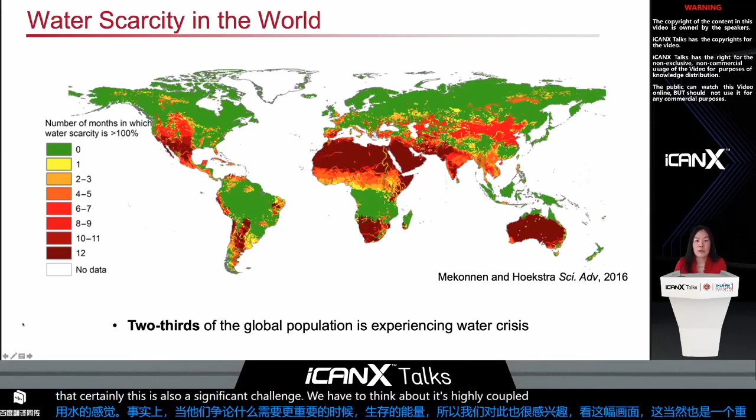So we have been very interested and motivated by this picture, and the fact that certainly this is also a significant challenge that we have to think about, and it's highly coupled to the energy landscape. So I just show you here an example of that. For example, when we think about the power plants that we need for power generation right now, this is a picture just of the US.

But in fact, these thermoelectric power plants withdraw about 40% of fresh water in the US. And so you can see that the amount of water that's used such that we can cool the power plants is significant. And so there is an important intersection in thinking about energy and water.

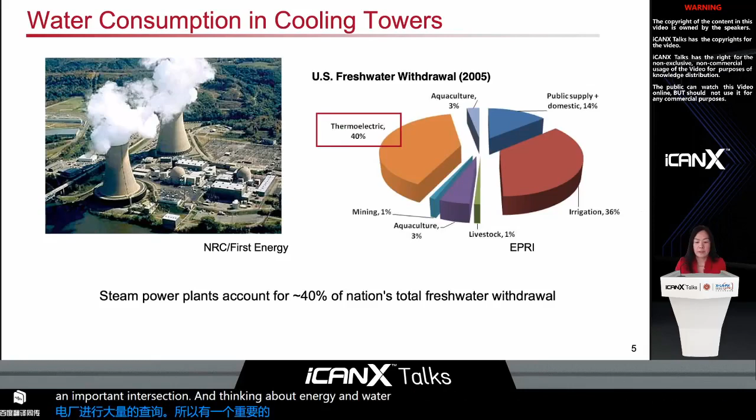This is where I think there are significant opportunities for new technologies, and the opportunities that advanced materials and nanotechnology have brought in recent decades. These engineered materials have enabled us to create new and enhanced functionality for all sorts of different applications. For example, you can now have new material properties, whether they're electrical, mechanical, or thermal. You can manipulate light in new and interesting ways.

You can change how droplets form on surfaces, or can we get fouling resistance using these kinds of structures? We can think about how we can develop methods using these materials for CO2 capture or energy conversion and storage, and the list goes on and on.

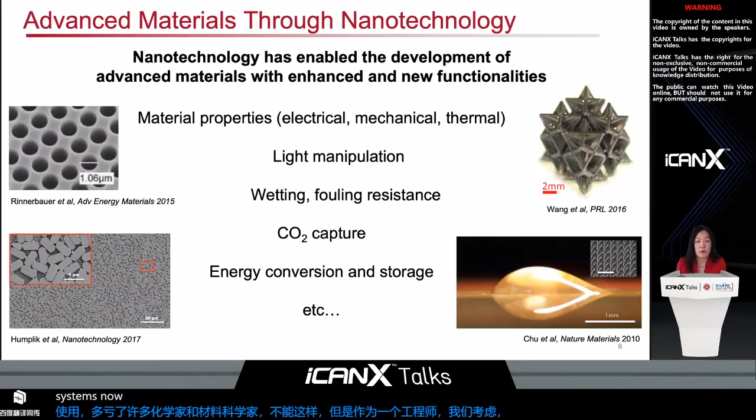So really the reality is that now we have all sorts of varieties of materials that we can work with, thanks to a lot of the chemists and material scientists who have enabled this. But as engineers, we think about how we get these kinds of materials into systems with enhanced performance, such that we can address all of the challenges related to energy and water.

So what I think about is while these materials are often tailored at the nano and micro scales, there is an opportunity now to think about systems that are much larger than that. But as I mentioned already, it's not just about the materials, because you have to engineer the system.

And I believe that the strength of my research group has been being able to now take these materials and actually engineer them using the analytical models and simulation tools that we have, such that we can make more efficient, say, water systems or energy conversion systems.

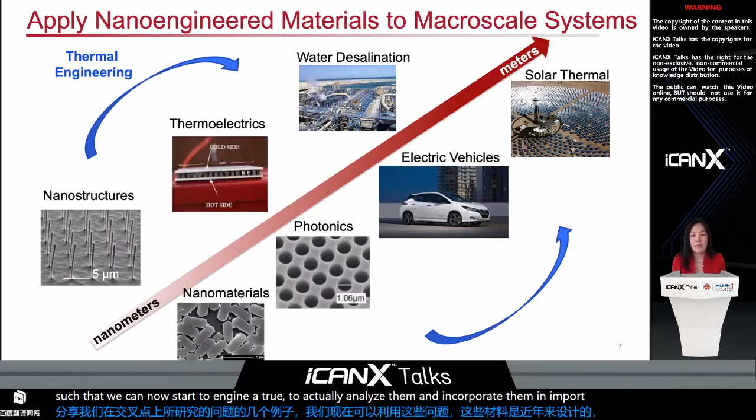So what I'll do today is share with you just a few examples of the problems we've been working on at this intersection, where we can actually now take advantage of all these wonderful materials that have been engineered in recent years, such that we can now start to actually utilize them and incorporate them in important ways, and where we build on the models to actually create these high performance devices.

So with that, I thought I'd start off talking a little bit about solar thermal power generation. Many of you may be already aware of this type of system that I show in this image. This is the parabolic trough concentrating solar thermal power generation system, by which you utilize the sunlight and, via the trough that you can see here, concentrate the sunlight in the form of heat that heats up a fluid in this pipe that then drives the steam cycle.

And this is now one of the more readily deployed technologies. However, it's still very highly costly. So the opportunity is not only to improve efficiency, but also to reduce costs of these systems.

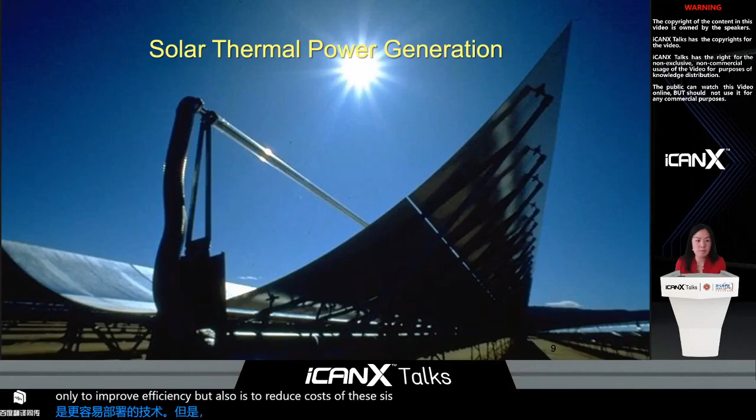When we zoom into this picture of a solar thermal power plant, like what I showed you with a parabolic trough system, the conversion from solar to thermal is typically on the order of about 55% efficient. And when you convert from thermal to electrical using a power cycle, a steam cycle, it's about 25% efficient. So the total efficiency of these systems is reasonably low, about 10 to 15%. And that poses challenges for the deployment of these systems in terms of how much it costs as well.

Of course, steam cycles have been around a long time, and I won't focus too much on it, but I'll share with you a snapshot of the more fundamental things we're doing that we think have important relevance in terms of improving the efficiency here. In particular, this graph on the left shows that there are important opportunities to increase the net efficiency of the steam cycle in this power plant by decreasing the steam condensation temperature and the turbine back pressure.

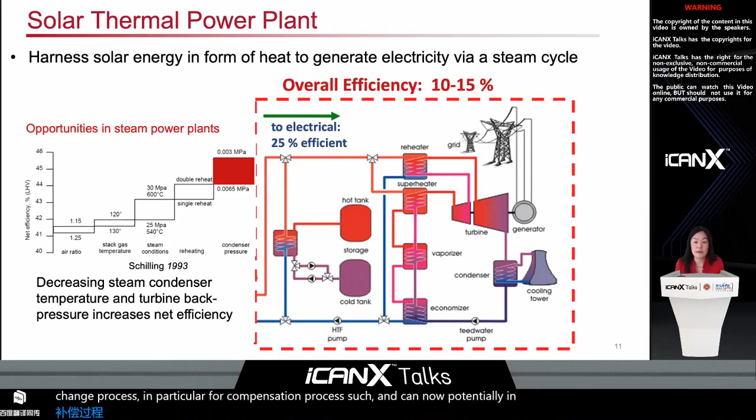So we've been focused a lot on phase change, because this kind of cycle relies on liquid to vapor phase change. And a significant opportunity is how to enhance the phase change process, in particular the condensation process, such that we can potentially increase the efficiency. Our group has focused on enhancing phase change heat transfer for some time. It's been the bread and butter of my group since I started, since my PhD was also focused on phase change.

So I'm still pursuing it, but I would say more of the opportunities have been posed by engineering the surface, by using novel structures, such as the examples shown in the middle here, to harness new behavior of phase change, such that we can enhance condensation efficiency and potentially incorporate these into these power cycles.

I'll just show you a few snapshots showing some nice images of phase change when you have these engineered materials, such as what you see in the middle, where instead of droplets shedding via gravity at very large length scales, typically on the order of a few millimeters, you have very small droplets that shed off because of the coalescence of droplets that eject because of the superhydrophobic surfaces that we've created on these pipes.

Now we've been able to not only rely on a combination of surface coatings and these kinds of structures to harness enhanced condensation behavior, but what I show you on the right is some of our more recent work by which now we can rely just on structure. And even in the case when you have condensation on these structures, you can maintain non-wetting type droplets that can roll off via gravity. And this presents also opportunities for more robust concepts that don't rely on the chemistries themselves.

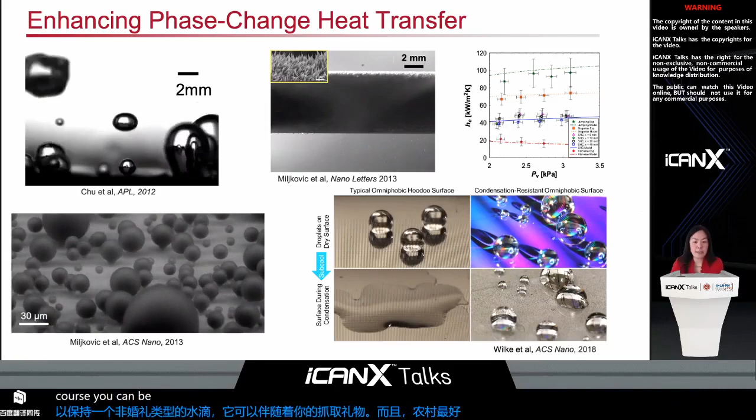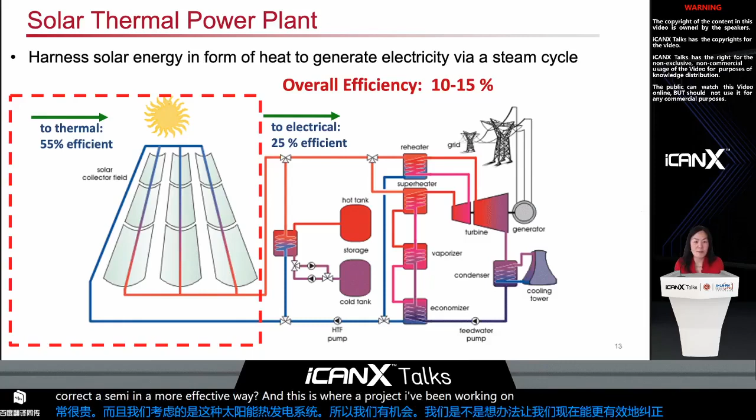So if you're interested, of course, you can read more about it, but I thought that I would now switch over and talk about the other side, which is the collection side. And as I mentioned, concentrators are typically quite expensive when we think about these kinds of solar thermal power generation systems. So an opportunity is rethinking ways for us to collect the sunlight in a more effective way. And this is where a project I've been working on for some time with Professor Gang Chen, on using aerogels as a way to create more efficient solar thermal receiver designs at lower cost.

So this has been a collaborative project for about 4 years or so, with a collection of students in my group as well as his group. In fact, through Professor Chen's leadership, this is really how we were able to receive funding through a government agency called ARPA-E in the US, which is focused on high impact, high risk problems for addressing energy.

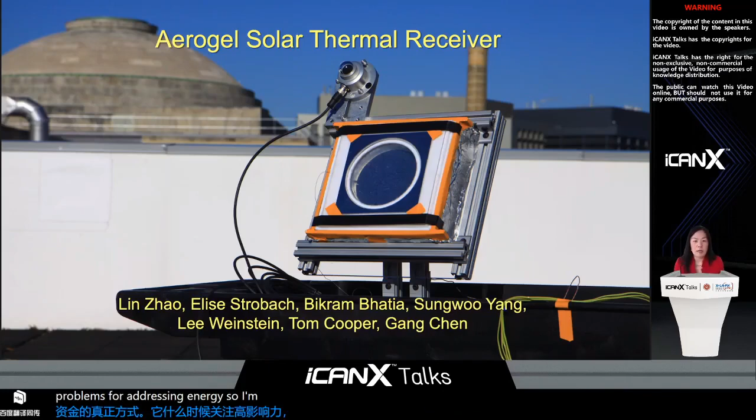So here, the concept that we've been focused on is developing a new material. While you may be familiar with aerogels, which I'll talk about in the next slide, aerogels have often been used in, say, buildings for insulation because they're known for very high insulation properties. However, typically, they don't have the optical transparency that you want, such that you can imagine a configuration as I show here.

So what I show you here is a concept where the idea is to develop a very high efficiency, lower cost, air stable solar thermal receiver design, by which you have black absorbers, which allow us to collect the sunlight in the form of heat to then transfer the heat to a working fluid, such as oil. The key here, though, is we want to minimize losses. And the way to do that is to introduce this aerogel that can allow the sunlight to penetrate and heat up these pipes effectively while minimizing the heat losses.

And if we could do this effectively, we can imagine configurations as shown here, such as interfacing with a lower cost, lower concentration type system, such as linear Fresnel. And I should mention the reason why we've been very interested in solar thermal as opposed to, say, photovoltaics is the opportunity for heat storage and dispatchability. So this is the concept that we've been working on for some time. And it's heavily reliant on the material, right? Whether we can actually create a material that allows us to achieve this concept.

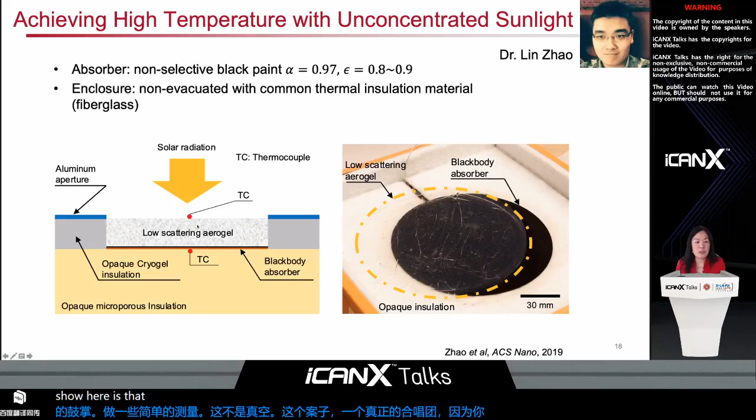And it is non-vacuum in this case, so you don't require vacuum now because you have this low scattering aerogel in its place. And what we show here is that when we do measurements, this is now in a lab experiment. You can see this is a temperature response as you introduce the solar radiation as a function of time. And this is at ambient temperature with about a 20 millimeter thick aerogel. You can see that, in fact, the absorber now reaches temperatures over about 240 degrees.

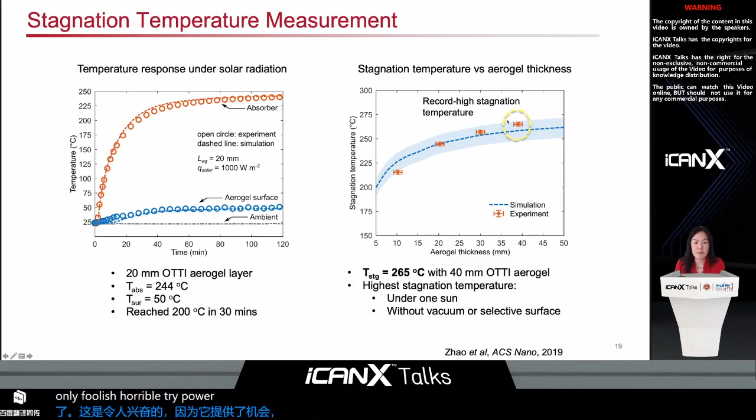Now, of course, as you increase the thickness, you expect the performance to be even better. So the stagnation temperature is shown as a function of the thickness. And we've been able to reach under one sun, so no concentration and without a vacuum or selective surface, a record high stagnation temperature because of the presence of our aerogel that we've created. This has been exciting because of the opportunities it presents, not only for solar thermal power generation systems, but also potentially using this kind of heat for industrial processes as well. This is done in the lab.

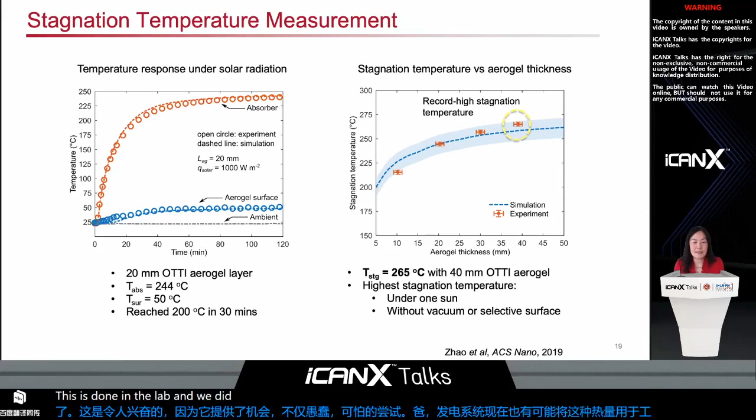And our next experiment was on a rooftop of MIT, as you see here, done on a sunny winter day, where the ambient temperature is less than about 1 degree Celsius. And you can see that even in these very cold conditions, once we introduced the sunlight outside to this absorber, the absorber reached over 220 degrees or so. So this certainly shows the significance of how we can take advantage of the material to get high temperature surfaces.

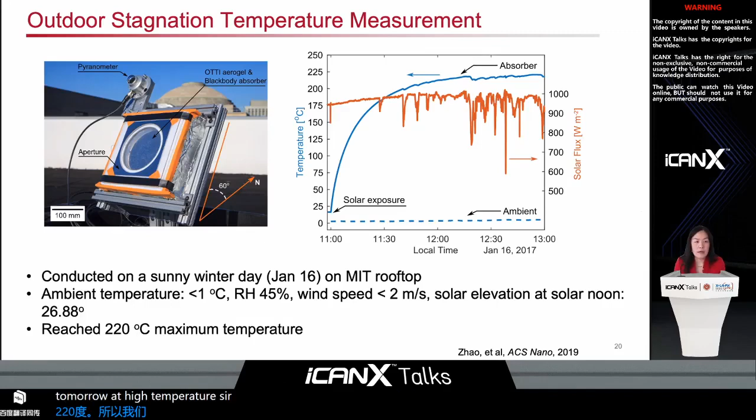Of course, as I showed you earlier, the conception of this project was thinking about how we might be able to use this for a solar thermal concentrating system for power generation. And so through these years of effort, we have been able to build a prototype, which you see here, which is about 1 meter long, tiled with these aerogels because of limitations in terms of scalability.

And we show that we've been able to build a system with this type of receiver interfaced with a linear Fresnel array. Like I said, this was a multi-year effort to actually build the system, which turned out to be much more challenging than the conceptual aspects of it. And we show that this kind of aerogel receiver can have significantly higher performance than when you don't have an aerogel. And so we've been excited about this as one potential pathway.

Of course, one of the challenges we face to realize this kind of system is scaling the materials. As I mentioned, we tiled them. And so this is something we've been pursuing, as I'll talk about next: a student of mine has decided to spin out a company focused on this. But it pivoted, because once we developed this material, there are other applications that can be enabled. One of them, highlighted in this image, is that because of this excellent transparency, or in the windows world, clarity of the window, my student has been interested in pursuing the windows market with this technology.

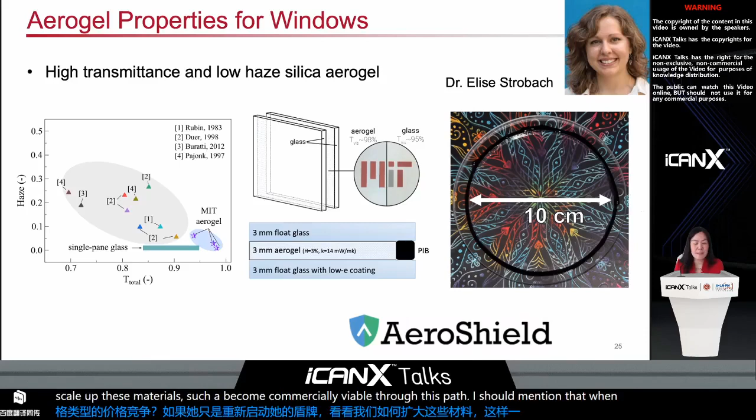So through this path, what has happened is it inspired another one of my students, Arnie, to look at other types of aerogel structures. In this case, he's been looking at a material called polyethylene for another application related to passive radiative cooling.

So when we think about the Earth's energy balance, the reason that the Earth just doesn't continue to heat up, and in fact, there is infrared emission towards space, right? And it turns out the reason that happens is because there is an overlap between the black body emission spectrum and the atmospheric window that allows radiative cooling on the Earth.

And so this has been a very interesting area by which there's been a lot of interest in recent years by being able to take advantage of this kind of atmospheric window in the ranges of 8 to 13 microns, such that you can actually use radiative cooling to reject heat from various objects on Earth.

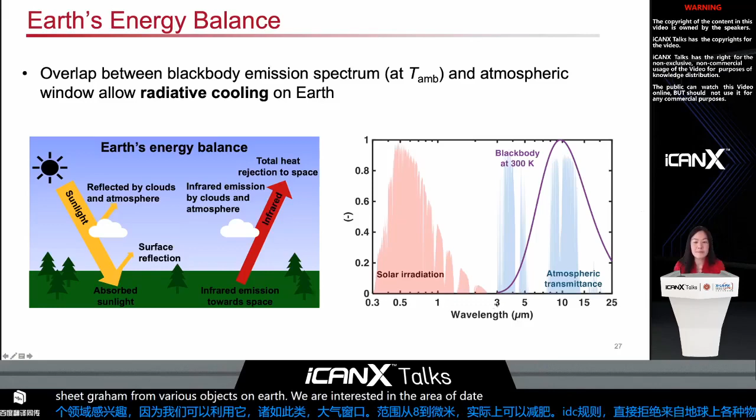So an opportunity arose from my group in thinking about the expertise we've had with aerogels, and thinking about how we could potentially develop material that can still have high reflectance or even improved reflectance such that we can start to access more of this space and also have excellent thermal insulation in the process. And as I mentioned already, aerogels are typically known to be very good thermal insulators.

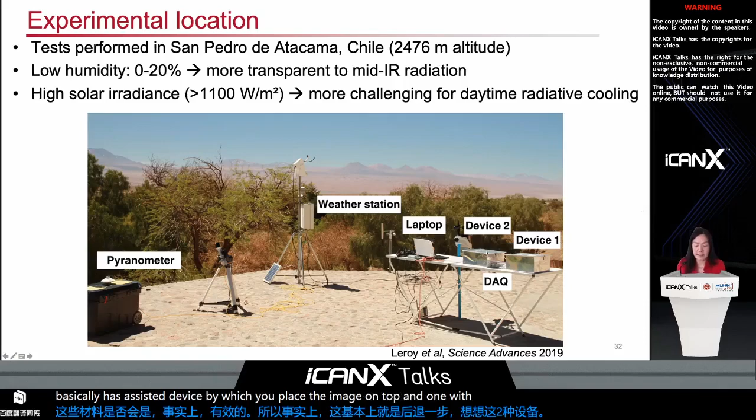So this presents interesting opportunities because radiative cooling is a passive technique, and you can think about how you can potentially make it low cost enough for, say, developing world applications as well, by which we can use this for refrigeration of food produce, or even building cooling and how we can reduce the loads in air conditioning units using this kind of passive approach. So I thought I'd give you this example as a direction that we pursued from developing expertise in aerogels.

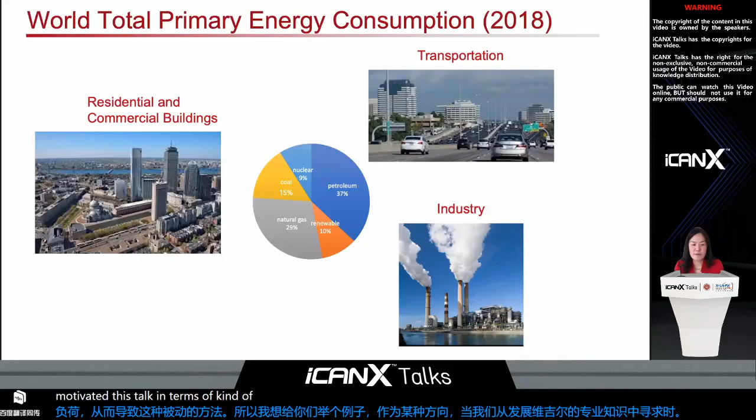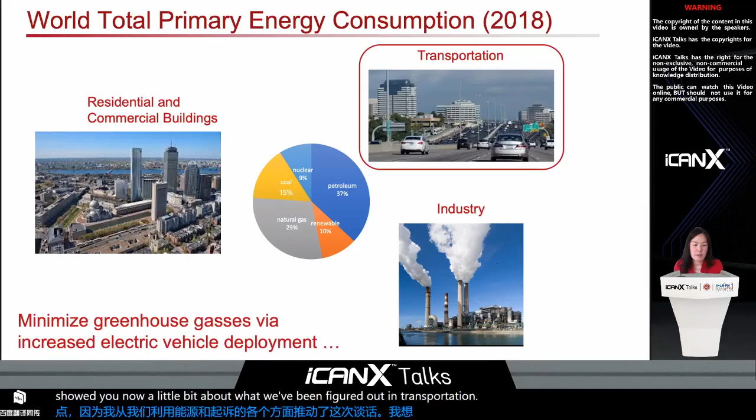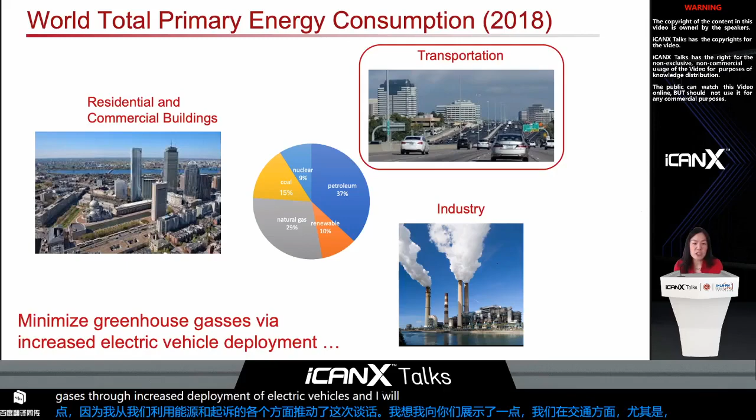Now I thought I'd switch gears a little bit, as I motivated this talk in terms of the various places by which we take advantage of our energy sources and consume it. I thought I'd share with you a little bit about what we've been thinking about in transportation, and in particular, how do we minimize greenhouse gases through increased deployment of electric vehicles? And I will say one of the biggest challenges with electric vehicles is driving range. And this is a project that we started about 5 years ago or so.

And this is also in collaboration with Professor Chen, Omar Yagi, and Carlos Hidrovo, by which we were also funded by ARPA-E to think about new thermal batteries for electric vehicles. One of the biggest challenges, as I mentioned already, is that driving range is what limits the deployment of electric vehicles. And in fact, one of the things that dictate driving range is your HVAC system. It can decrease your driving range by up to about 40%, as shown here.

And so what we sought to do is develop a new HVAC system, which is called a thermal battery. The reason it's called a thermal battery is that instead of relying on your electrical battery to heat and cool your cabin, you're actually now charging it before you drive, such that it doesn't rely on electric battery power to provide the heating and cooling that you need for your comfort. So that's been the concept that we worked on.

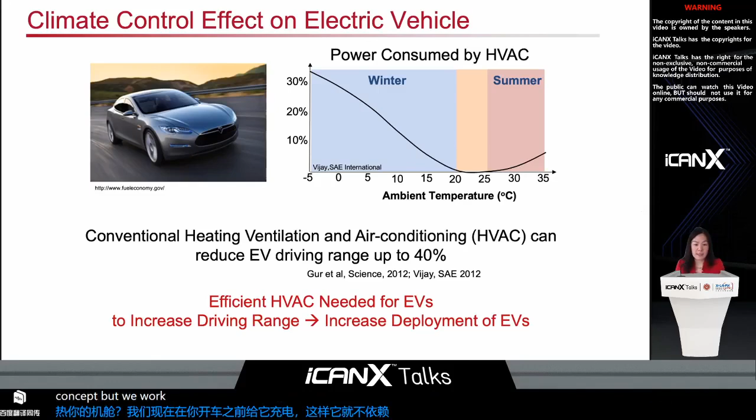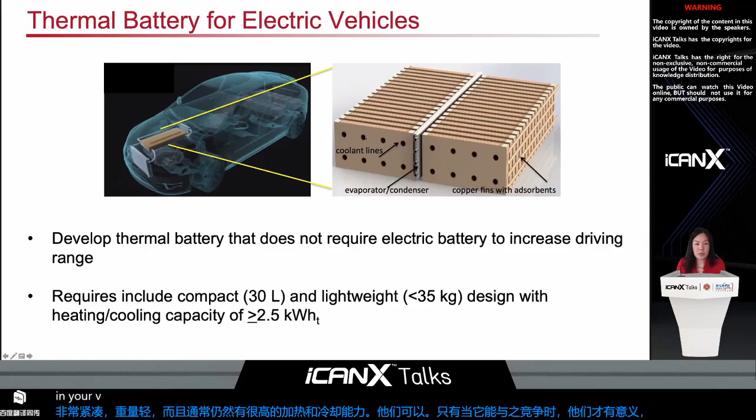And what I show you here is that ARPA-E sought to fund us to create something that's very compact, lightweight, and still have reasonably high heating and cooling capacities, because it would only make sense if it could compete with what an electrical battery can do when driving a typical HVAC system in your vehicle. And this is where we came up with an idea that relies on the concept of adsorption.

The idea here is when you have a surface, such as shown here, and you have, say, a pool of water, when you have a chemical potential difference between this dry adsorbent or solid surface and your water, you can evaporate and it adsorbs onto this surface, which is exothermic and releases heat. Now when you desorb it, you use energy, it could be in the form of heat, to release the water, and then you condense it, which is an exothermic process.

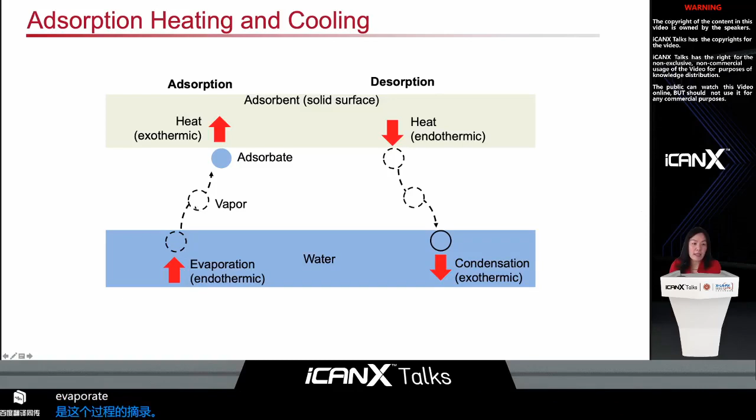So the idea here is that we want to evaporate, and if you evaporate, you cool in that process, so that you can get your heating and cooling streams from the adsorption process itself, depending on where you channel and provide heat exchange to your system. And this is really fundamentally what we've been using in thinking about adsorption processes, not just for this electric vehicle, but, as I'll show you later, water harvesting.

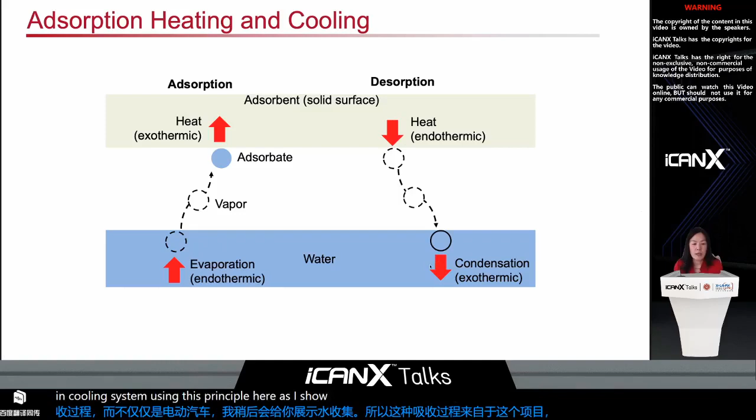And so this concept came out of this project by which we want to develop an adsorption-based heating and cooling system using this principle. The idea now is integrating it into a system concept. So we have this reservoir of water, an evaporator, an adsorbent bed, and a condenser. In the cooling mode, you have an adsorbent that is dry, so there's a chemical potential difference between your wet reservoir and your adsorbent.

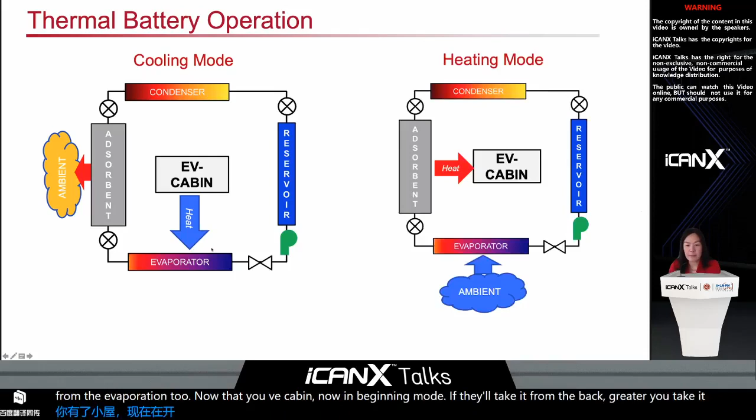And through the process, you evaporate. When you're evaporating, you can feed the cooling you get from the evaporation to the EV cabin. Now in the heating mode, instead of taking it from the evaporator, you take it from your adsorbent bed. Once those water molecules adsorb onto your adsorbent, as I mentioned, this is exothermic. It releases heat, and that can be delivered to your electric vehicle cabin.

Of course, how do you charge it? The way you would charge it is you interface it with the condenser, apply heat to the system, release the water and condense it, and eventually put it back into your reservoir. So this is a concept you can take advantage of, and we've demonstrated it through the years.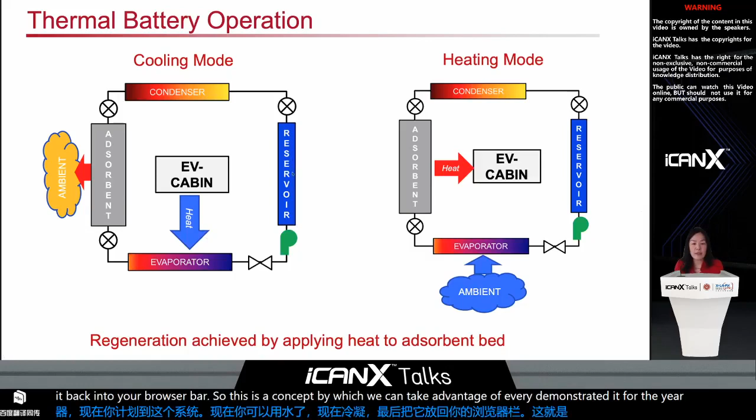And this relies not only on novel material sets, such as really high capacity adsorbents like zeolites and metal organic frameworks, a new class of materials that have received a lot of interest in recent years, but also on how we can enhance the thermal and mechanical properties to realize this kind of stack design for a thermal battery, and the optimization of the thermal engineering aspects.

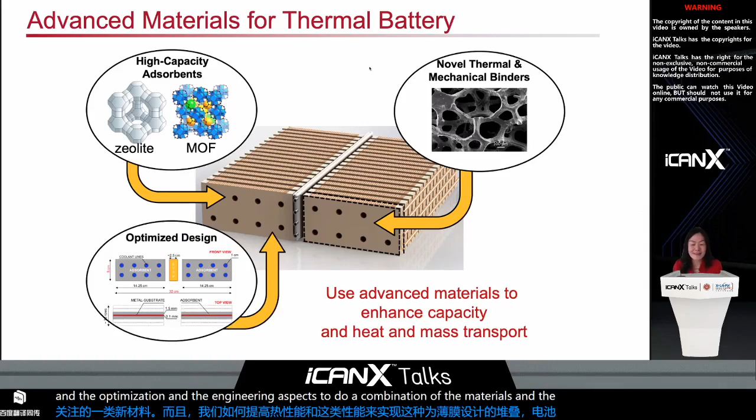So through the combination of the materials and the thermal design, we've been able to achieve a system where we can start to think about how we might actually incorporate it into an actual vehicle design. In fact, that's what we've been working on with Ford for quite some years.

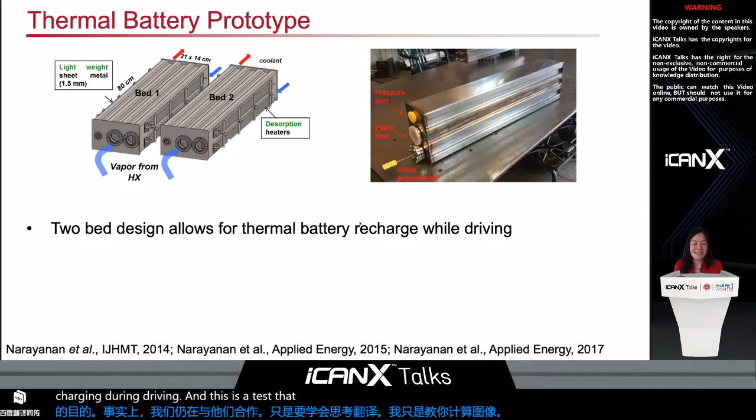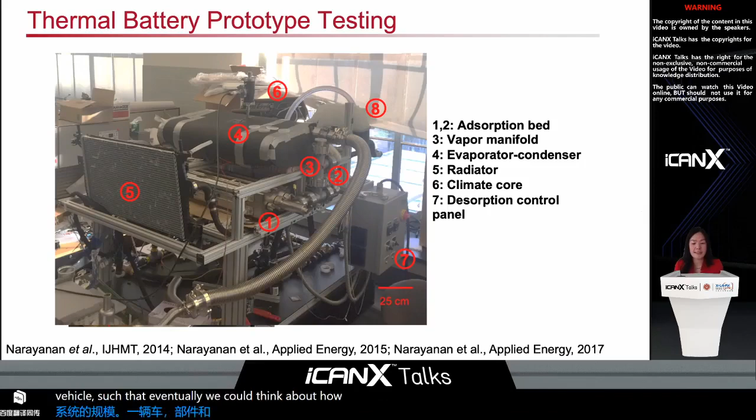And in fact, we're still working with them to now start to think about translation. And so I just show you a few images of a two-bed type design, such that this can facilitate even recharging during driving. And this is a test setup. You can see that it doesn't ever look that pretty in the lab, but I thought I'd show you this so you can get a sense of the scale of this kind of system that we've interfaced with the vehicle components in a typical electric vehicle, such that eventually we can think about how all this packs in to the design and ultimately demonstrate performance where we can achieve the heating and cooling that we've set out to.

When we think about now this energy storage mapping, we're getting to a place by which we can start to really compete with electrical batteries when interfaced with that vapor compression system, such that this becomes a more viable technology. As I mentioned, this is something that we've been pursuing with Ford as a partner. And we think not only can this be applied in the electric vehicles market, we think that this concept of adsorption that pushes the performance of the materials and the systems design can also be used for HVAC, such as adsorption-based heating and cooling systems as well.

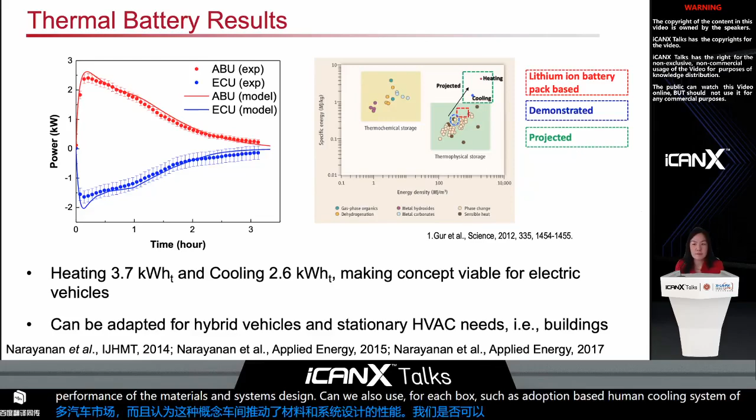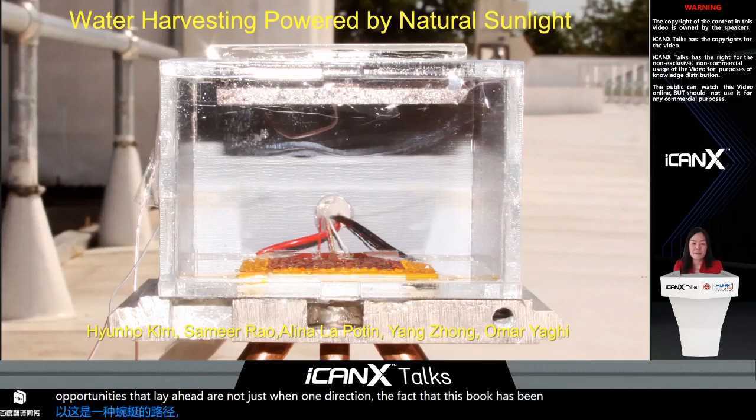So this brings me to just a couple more research projects. I shared the electric vehicle thermal battery work because, in fact, this is how we got into water harvesting. So it's kind of a meandering path; as I mentioned, often you start to realize the opportunities that lay ahead are not just one direction. And in fact, this work has been in collaboration with Omar Yaghi's group because of this work that we developed with electric vehicles.

So when we think about the water in terms of how much there is actually in the air around us, it's equivalent to about 13,000 trillion liters. So there's a lot of water in the air. So when we think about water scarcity maps, we think there is a significant opportunity in being able to harness some of that water in the air for clean drinking water. And water harvesting has been known for some time. One of the most prevalent methods used right now is called dewing, which is very well suited for high humidity conditions.

But you can see here that when the humidity starts to get low and the ambient temperatures also are low, you start to see a challenge with the efficiencies of these dewing systems, which essentially rely on condensation with a refrigeration type cycle to get your water. So here we see the thermal efficiency as a function of relative humidity. And in this regime, this dewing process, relying on refrigeration, becomes infeasible when the humidity becomes low. And when the dew point becomes negative, you can imagine the amount of energy needed to freeze the water becomes tremendous. So there certainly are limitations to dewing.

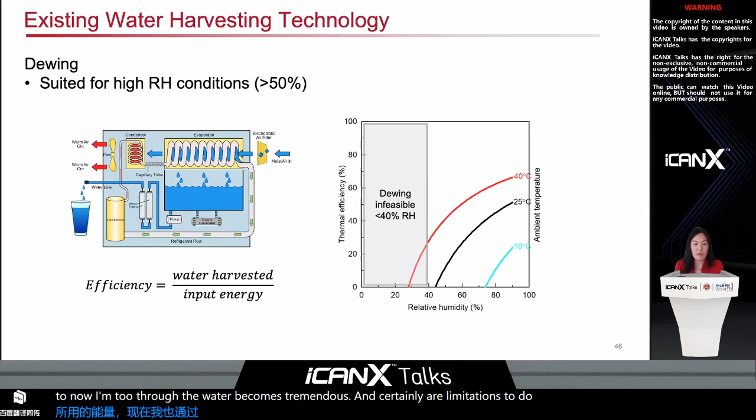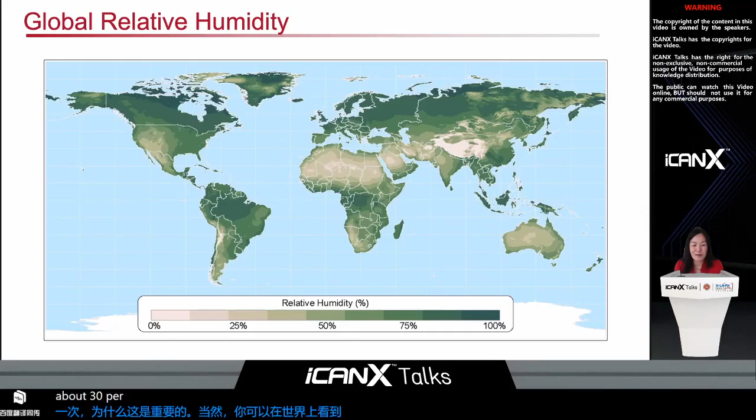And this is where we think there is significant opportunity ahead by which we want to leverage adsorption. And this just motivates, again, why this is important. You can see on the global map that there are a lot of areas where the relative humidity is usually lower than about 30%. And so this is where we'd like to pursue. What we've been looking at is a water harvesting technology by which you can extract water even in arid conditions, such as deserts. The concept here is very similar to what I just showed you in the previous section on thermal batteries. In fact, it relies on adsorption.

And the idea here is that you have a material. In this case, we're using metal organic frameworks, which I didn't touch upon in detail, but they have very unique characteristics by which you can look at an isotherm, which is the water uptake as a function of the humidity. The isotherm is the shape of this curve. You can see that different isotherms dictate what your water uptake is at what humidity conditions. And so the idea is to incorporate these materials into, say, a layer here on top. At nighttime, you can capture water from the moisture in the air into this material that's originally dry.

And during the daytime, you can in fact release the water from the material itself and then condense it. So again, it's an adsorption process, not used now for heating and cooling. However, those physics still exist, so you have to think about how you manage that in the system. But the idea here is now for water capture.

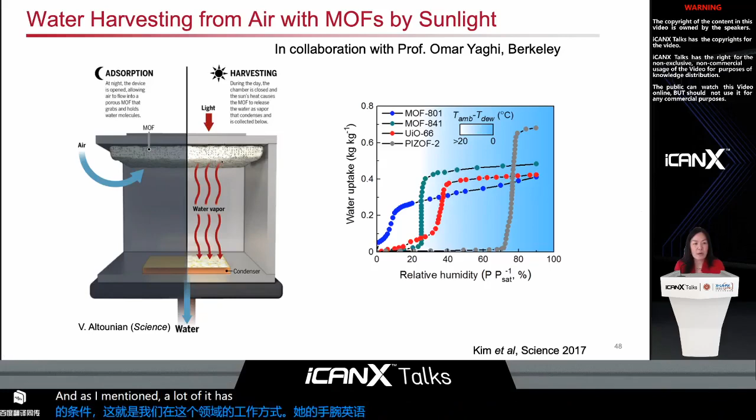And depending on what kinds of isotherms you have, you can imagine how you now tailor the kind of materials you need for particular conditions. And so that's how we started working in this area of water harvesting, which has been really exciting. And as I mentioned, a lot of it has been working with chemists, in this case with Omar Yaghi's group, where we use MOF 801 as a proof of concept for this.

And not only that, we're now also doing computational models to help us design the layer thickness so that we can get the kinetics appropriately, so how long it takes to adsorb and desorb, and do the characterizations in the lab before we can start to actually develop prototypes.

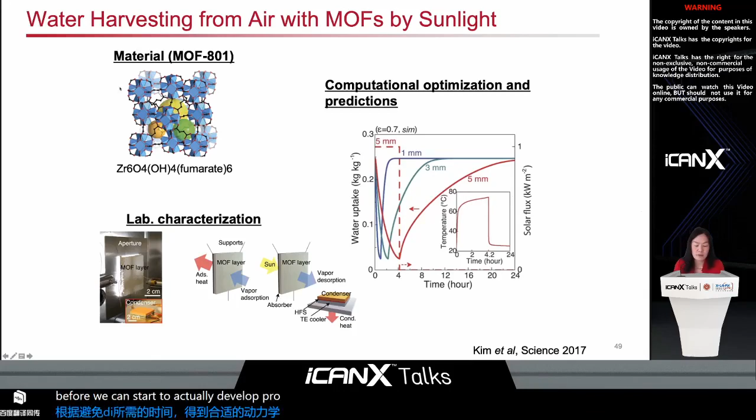And so what we've shown is a proof of concept water harvesting device where we used a single layer of this MOF 801, shown here on top, on the MIT rooftop, by which we've demonstrated that with this kind of approach, you can start to create water droplets that are clean in nature to harvest water. And this is a very first step proof of concept because the amount of water is small owing to the materials availability. But this suggests that there is a significant opportunity to take advantage of adsorption to start to realize water harvesting devices.

And in fact, we've been able to characterize it. So this is just showing the temperature to help us also compare with the models that we developed. And you can see here that the condensation temperature at which we can generate the water is above that of the ambient dew point. So we are not relying on dewing as other previous technologies have done.

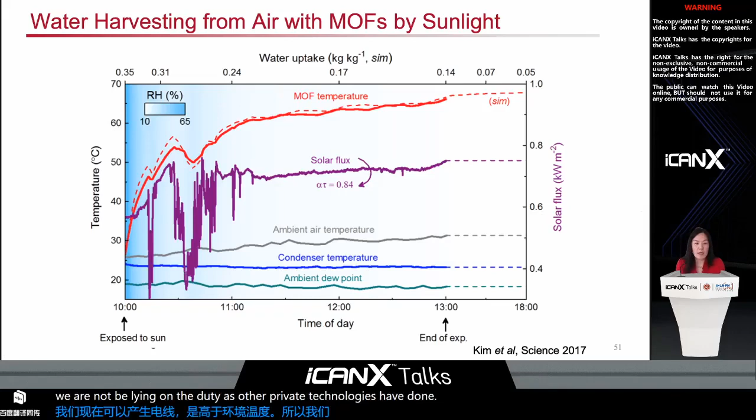We showed this initially at MIT, but what we wanted to show is that while dewing technologies are excellent at high humidities, when we have low humidity conditions, we believe adsorption is one of the most viable approaches ahead. And so we brought our harvester with some improvements to an arid area of the US in Arizona. And you can see that in these kinds of conditions, the dew point becomes negative. You can see the nighttime and daytime swing of the relative humidity in green. And so this becomes a very challenging condition in which other kinds of technologies are infeasible.

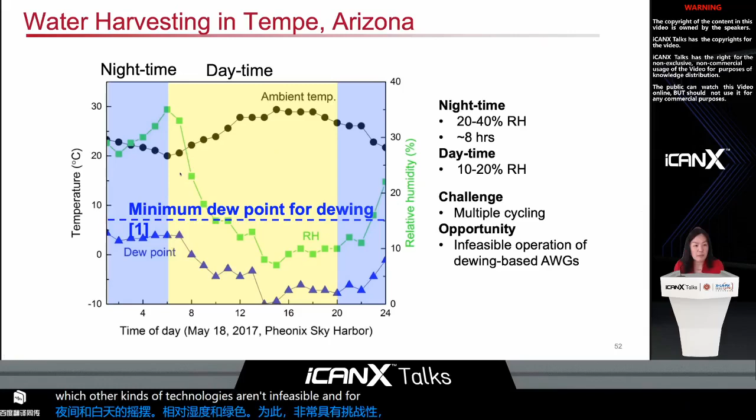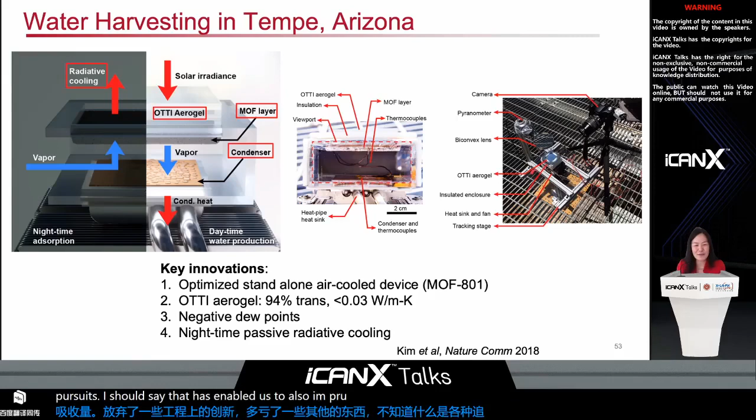And so we wanted to demonstrate our prototype, which we made some improvements on. I wanted to highlight this because we've been able to introduce some of the things that we've looked at in other studies, such as our aerogel, to maximize the solar flux onto our device, as well as using radiative cooling at nighttime, such that we can decrease the temperature to maximize the amount of adsorption on our surface. So we've done some innovations in engineering thanks to other things we've done in the lab. It's really the integration of various pursuits that has enabled us to improve the performance of our device, which is what I show you here. And I'll just show you a brief video of what it looks like on this device.

And you can see that it immediately fogs up because once you start to release the water molecules, it condenses everywhere essentially, and then starts to heat up everything, and you start to see the windows and the droplets that are forming through this system.

We can also do similar characterizations. You can see here temperature as a function of time for this particular device. And what we've been able to show is that we can achieve about 0.3 liters per kilogram of the material. And that's highly dependent, of course, on the isotherm of the material, the maximum uptake of the material itself. And certainly there's a lot of room for improvement, not only in the materials, but also scalability, such that we can start to realize high performing, larger scale systems that maybe we can use for remote areas and for families.

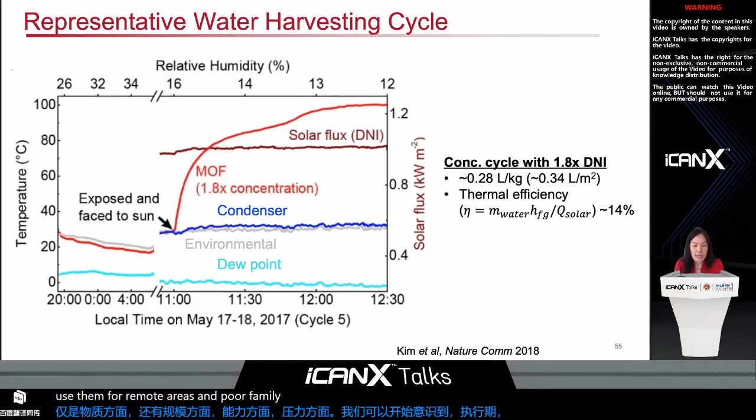And lastly, before I conclude, I thought I'd share with you another recent project that's more focused on thermal engineering. This is also inspired by various aspects of work in our lab, by which we've been able to think about how we can achieve higher performance or higher efficiency solar stills for water desalination. This is work in collaboration with Ruzhu Wang's group and John Lienhard's group, and led by a lot of my students and postdocs.

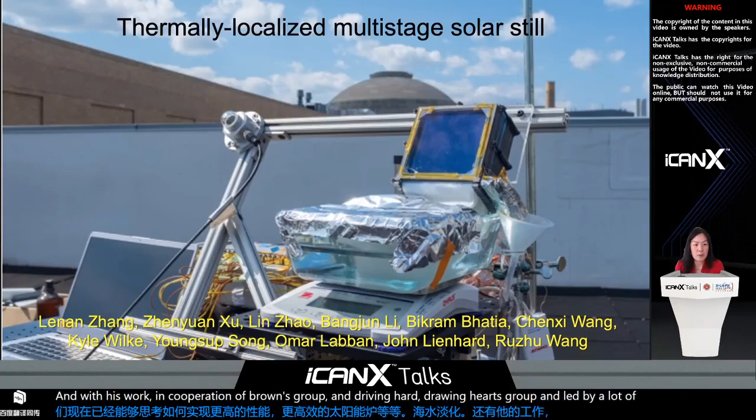Certainly when we think about water, we talked about water harvesting. Another very abundant area of research is water desalination, where in large scale systems, reverse osmosis is the main technology that people use. There's been a lot of interest in recent years, though, in remote compact units, such as what I show here. In fact, Professor Chen's group has been a leader in this area, introducing ideas such as local heat localization using novel structures, such as carbon foams, by which you can heat up locally the liquid-vapor interface, such that you can produce very efficient processes there. Also, there have been demonstrations of solar stills placed in salty ponds, by which you can achieve high performance in a passive way.

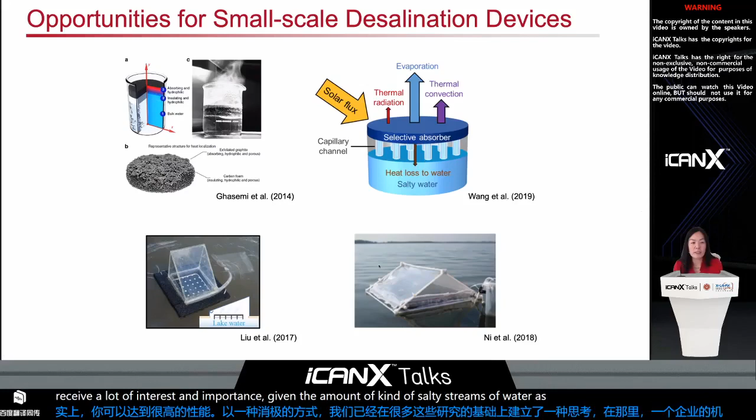We've been building on a lot of these studies to think about where the opportunities are, because certainly this has received a lot of interest, and its importance given the amount of salty streams and water reservoirs that exist in the world. However, there are still opportunities ahead, and that's where we try to focus, in terms of the challenges still with water production being relatively low because of various transport resistances and the vapor enthalpy that is lost to the ambient in these configurations, as well as the low flexibility of material choices, because often they need to couple high spectral absorbance or selective spectral absorbance, wickability because you're drawing liquid, and high thermal insulation, all together in the material.

And so what we've seen is an opportunity to think about how we can create a more efficient system, really thinking about systems design. One of the key aspects is, can we think about these solar still configurations by decoupling the functionalities of the solar absorption, the thermal insulation, and the water transport? So the idea here is a configuration where we place this solar still with excellent insulation. We actually use our aerogels here to interface it with an excellent solar absorber. And we have a low cost wick that drives the brine up and allows us to desalinate, and it effectively evaporates because of heat being interfaced to this low cost wick, so you can condense on a metal surface.

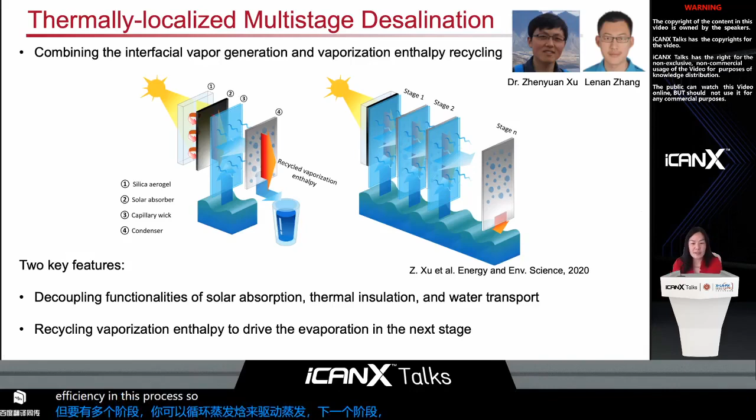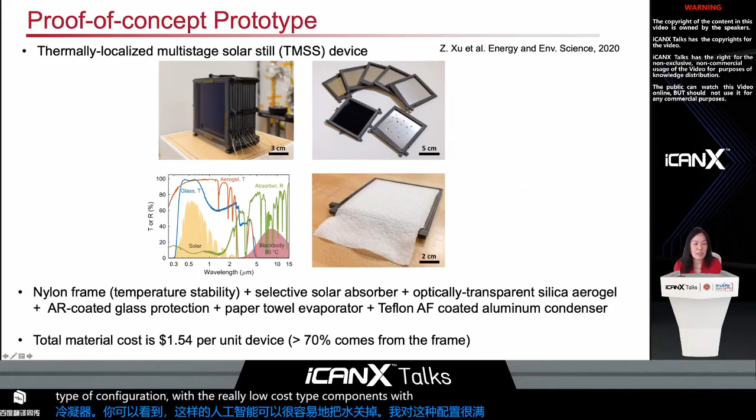The second aspect is not only having a single stage, but multiple stages, by which you can recycle the vaporization enthalpy to drive evaporation in the next stage to achieve much higher efficiency in this process. So that's the idea here. And we've been able to design a system. While I'm not showing all the details of the modeling efforts, we've been able to design a system with these low cost components. Here's a solar absorber with a multi-stage stack of about 10 of these layers. You can see here we just use a paper towel as a wick, so it's a very low cost system. And we use aluminum plates as our condensers that are hydrophobicized, such that they can shed off the water easily. With this configuration and these really low cost components, we've been able to do lab level testing by interfacing it with a solar simulator.

We can look at the amount of vapor flux generated at each stage. You can see that as you increase the number of stages, there is a decrease in the amount of vapor generated, because at some point you start to degrade the performance, since the heat that you have from the previous stage is lower. So in this case, we've been able to characterize these systems and show that we can expect a much higher efficiency, about 5 times improvement over a single stage device, using this configuration. And what was exciting about this is that because of the thermal engineering we've been able to do with these low cost materials, we've been able to access a regime much higher in terms of efficiencies and production rates compared to previous papers.

So we've also done some outdoor experiments with this, and we've shown through the outdoor experiments that in fact we have excellent performance as well, where we've been able to get a productivity of about 2.6 liters per kilowatt per hour. And it has implications as to how you might potentially incorporate these, thinking about scaling up these designs for use in a passive way for a lot of remote regions with access to salty streams.

I'll show you just a brief video here of the collection. So this was done on the rooftop. You can see here that over time, with this graduated cylinder in this setup, we start to accumulate the water through this process of evaporation and condensation with this multi-stage solar still.

That includes, of course, a need to think about scale-up of a lot of materials. I showed you some innovations that enable prototype designs, but to make them practical, we have to think about how we effectively scale up at a low enough cost that it becomes available in the market. There's a robustness aspect of the materials that becomes really important in terms of reliability. And of course, as I mentioned, the coupling between the novel materials and the device engineering becomes really critical, so that we can realize the performance we seek. And there are abundant opportunities ahead.